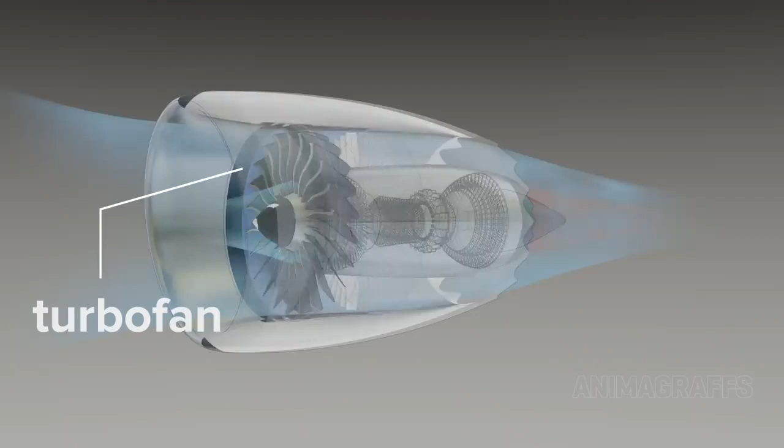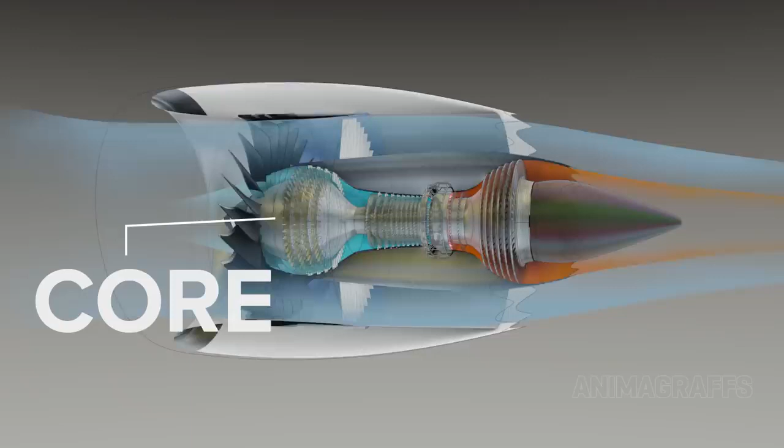Most jet-propelled airplanes use a turbofan design. The turbofan can be thought of as a high-tech propeller inside of a duct called a nacelle, driven by a gas generator: the core. The core of a jet engine is a gas generator that creates high-pressure gas to power a turbine. This setup has compressor, combustor, and turbine sections.

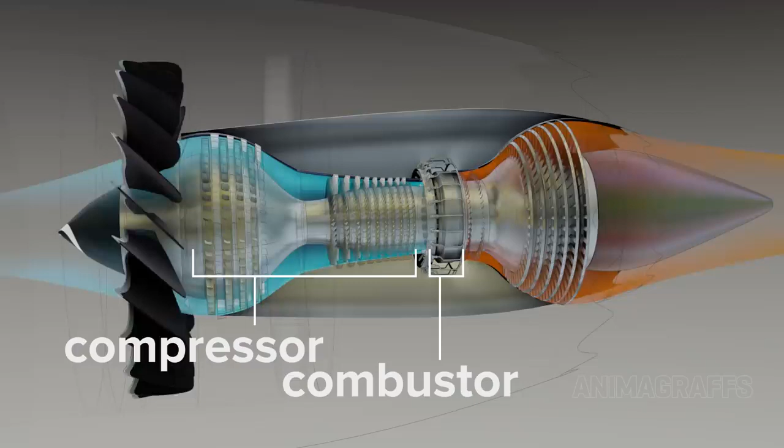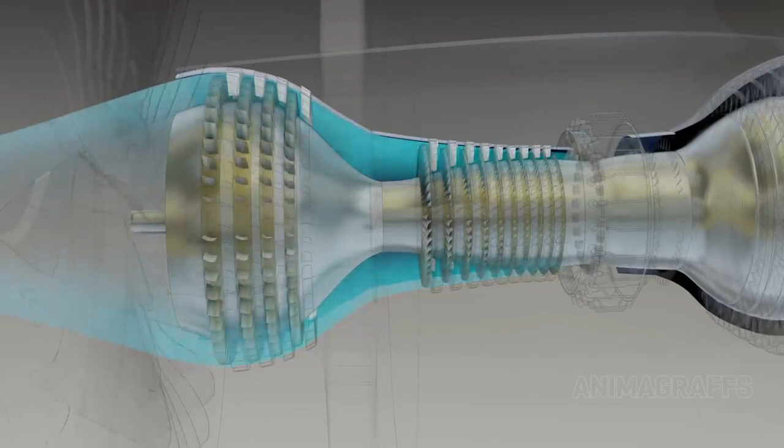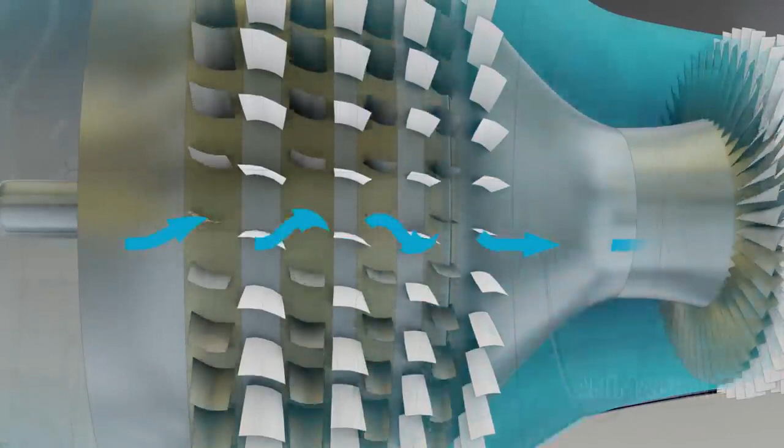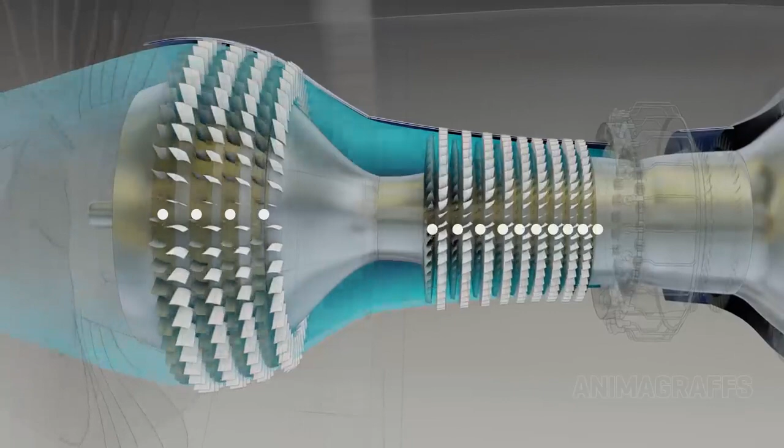The compressor. Compressed air makes for a much more powerful combustion reaction relative to engine size. Compression happens in stages that force incoming air into an increasingly narrow chamber. A single compressor stage is comprised of a spinning rotor paired with a ring of stationary stator vanes, which are attached to the core casing. Rotor blades swirl the air as they force it through the compressor. Stator vanes slow this swirling momentum in exchange for increased air pressure. The compressor has 4 low pressure and 10 high pressure stages.

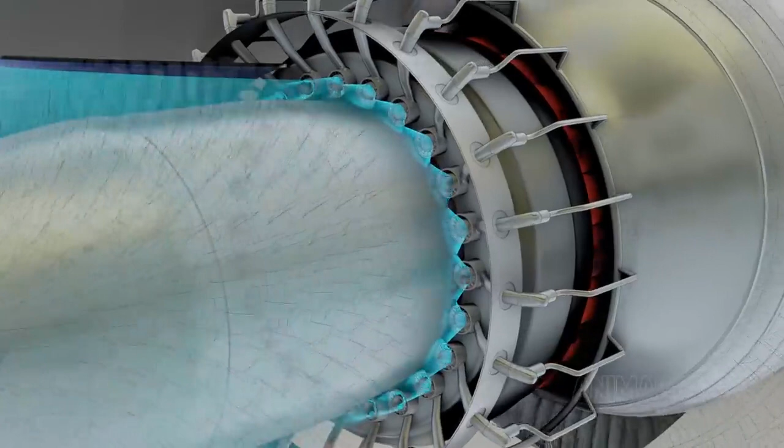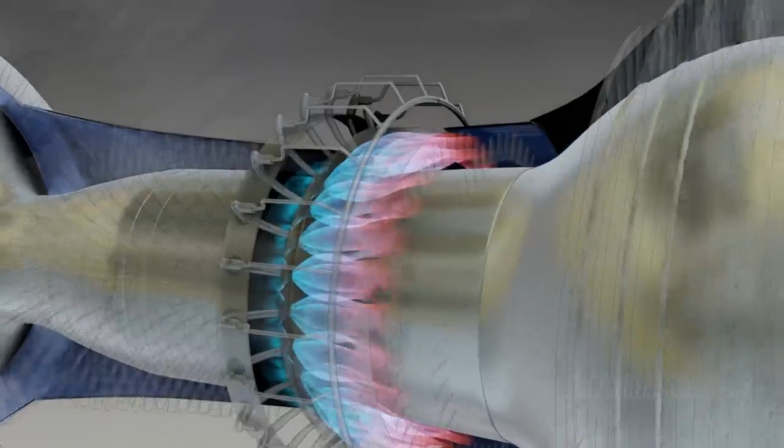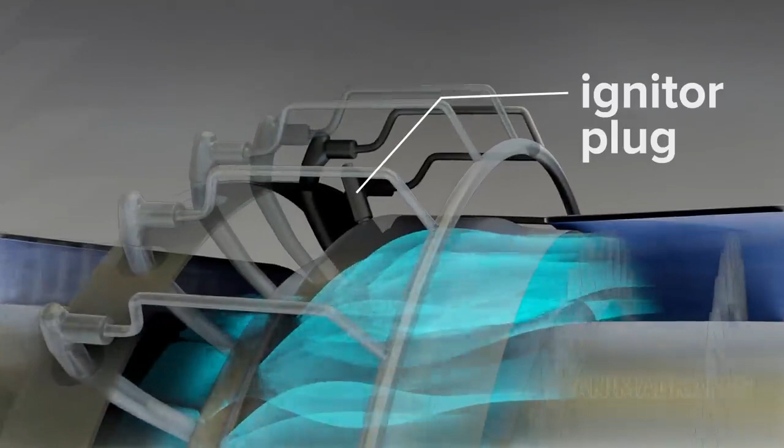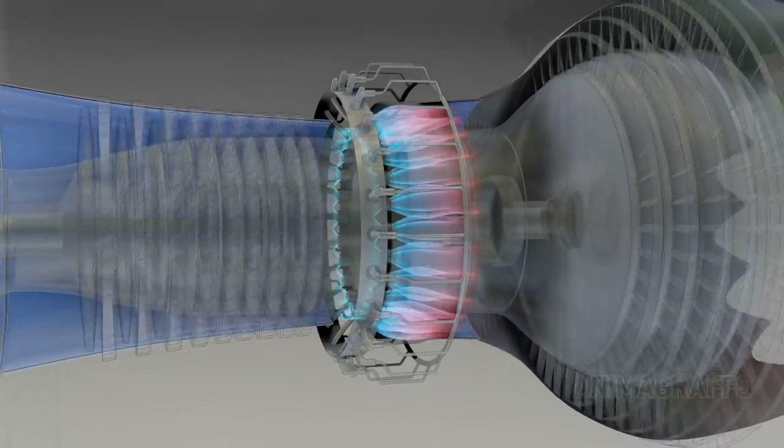The combustor. Air is mixed with fuel and ignited as it passes through the combustor, releasing a jet of super high-powered gas. The design shown here is an annular combustor, meaning ring-shaped. Compressed air enters the inlet nozzles. Each nozzle is coupled with a fuel injector and is designed to swirl the incoming fuel and air for an even mix. A couple of ignitor plugs, not unlike the spark plugs found in car engines, ignite this mixture, and the reaction spreads evenly around the ring. Once started, combustion continues as long as air and fuel are supplied.

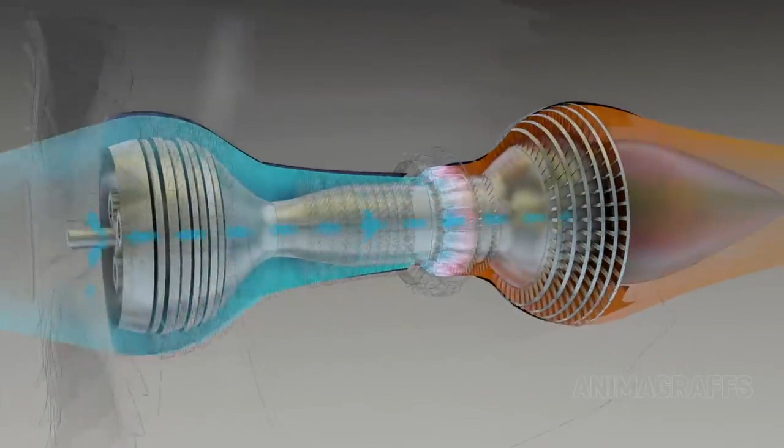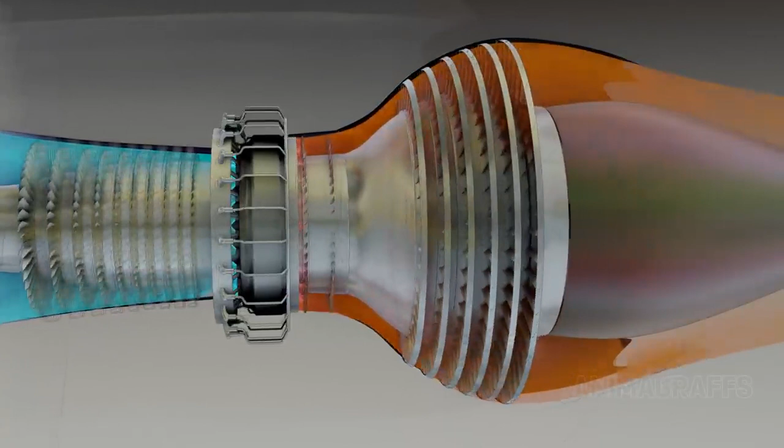The turbine. Turbines at the rear of the jet engine are powered by exhaust gases exiting the combustor. Much of the turbine power is used to turn the fan, while a smaller percentage powers the compressor stages. Turbine fins get extremely hot. Some air from the compressor is diverted for cooling, and special coatings are used to keep temperatures down.

The exhaust cone is specially shaped to mix and accelerate exhaust streams. It also covers sensitive internal engine parts.

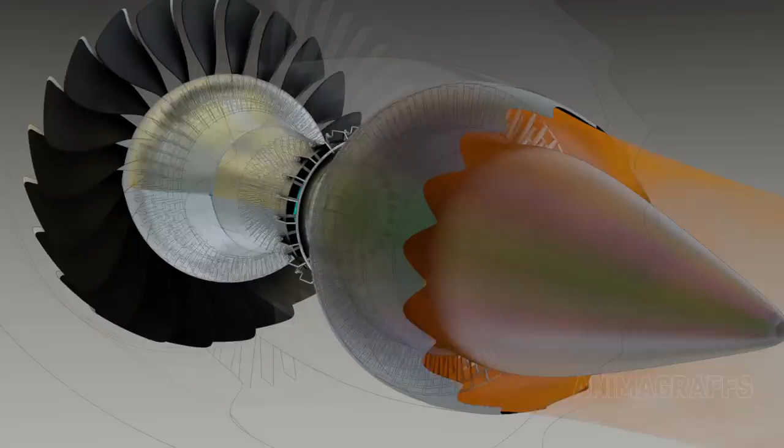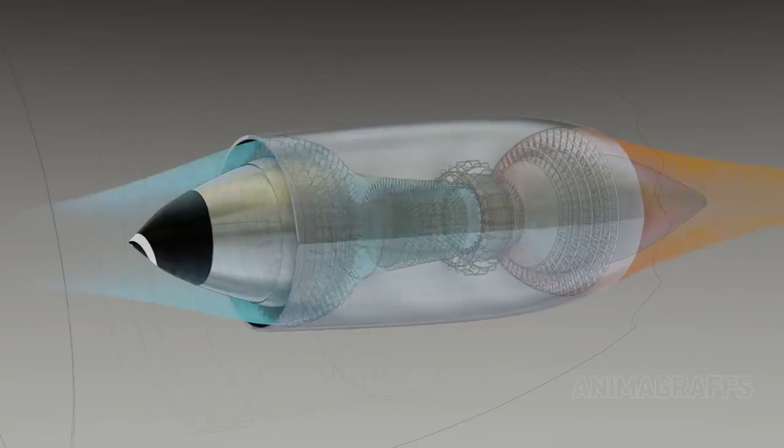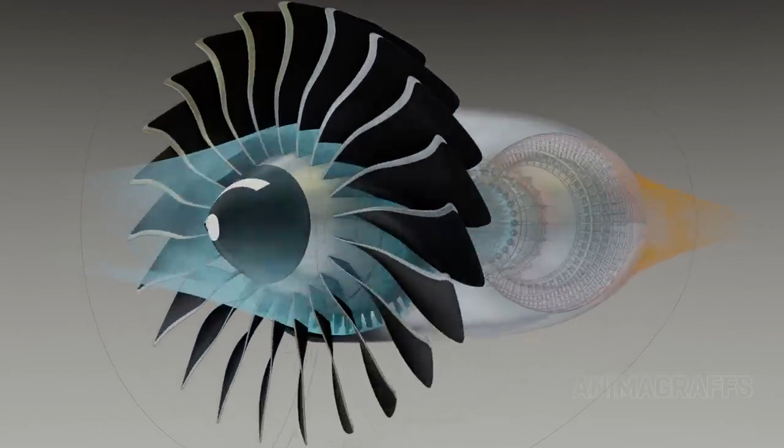The fan. Early jet engines were turbojets, where all incoming air flows through the core. Most modern winged aircraft engines are turbofans, where only a fraction of air enters the core or gas generator, and the resulting power turns a specially designed fan. Again, the fan can be thought of as a high-tech propeller inside of a duct. Air that does not enter the core is called bypass air.

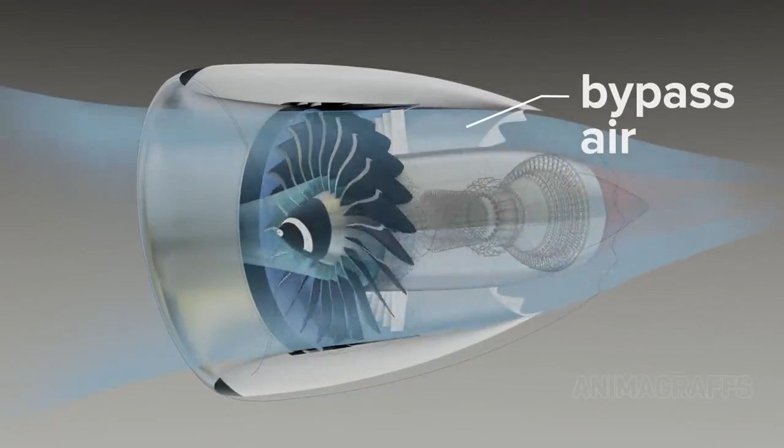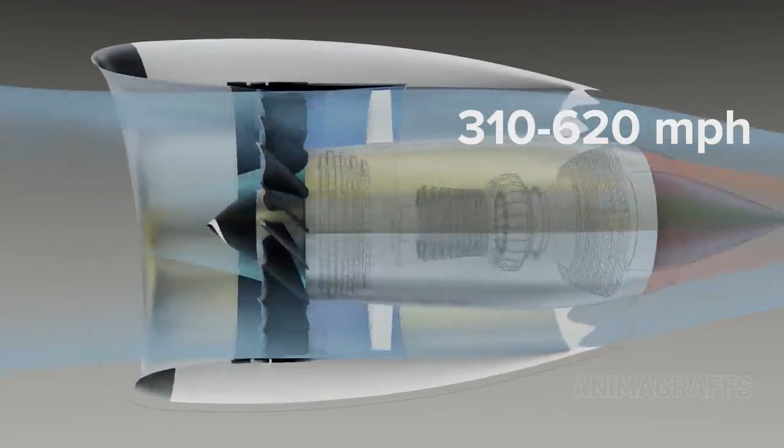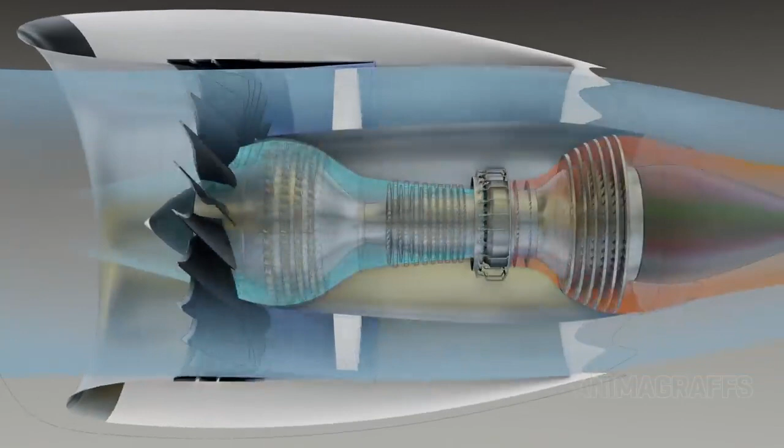High bypass engines are designed to move large quantities of air at slower cruising speeds, a range of about 310 to 620 miles per hour. The exchange for high efficiency is engine size. High bypass engines can be very large, with massive fans compared to core size. Commercial airliners or military transport aircraft are example applications.

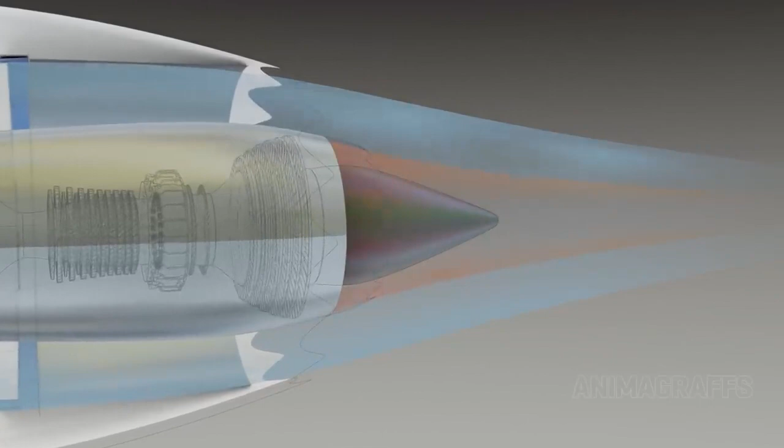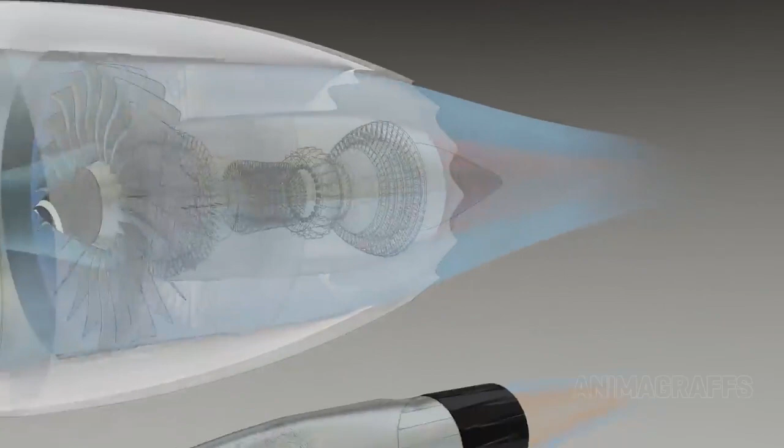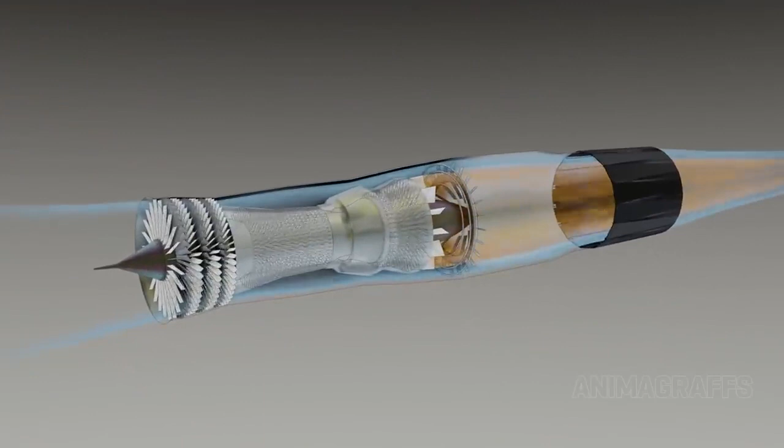Exhaust velocity is a major factor in jet engine noise. High bypass engines surround fast-moving core exhaust with large quantities of slower-moving bypass air for quieter operation. Military fighter aircraft use low bypass engines, which are more compact, have high power-to-weight ratios, plus supersonic and afterburner capabilities, in exchange for things like poor noise control and high fuel consumption.

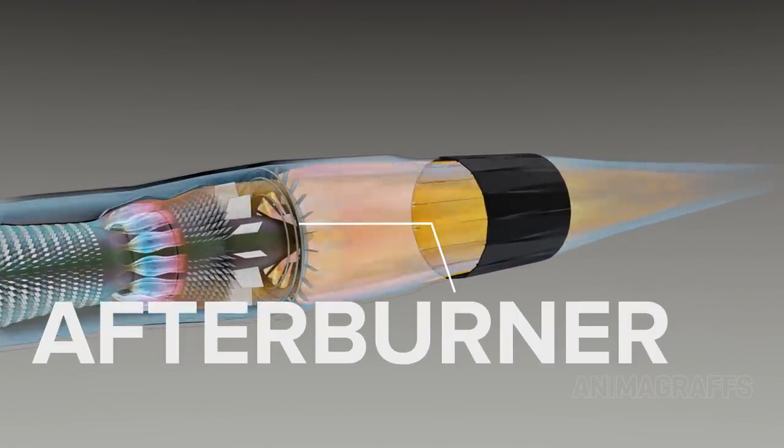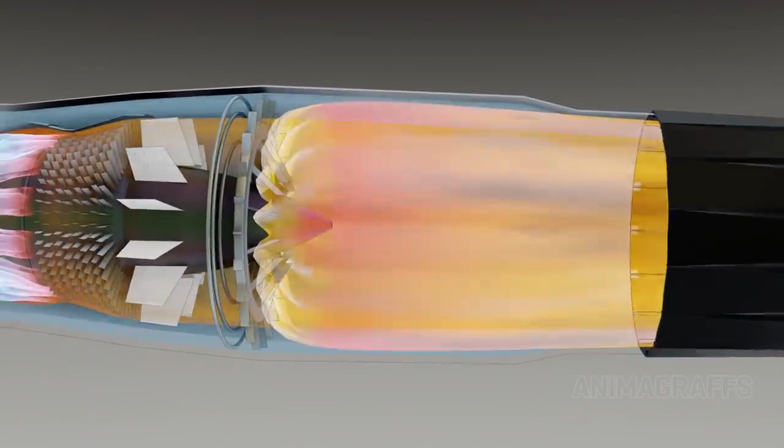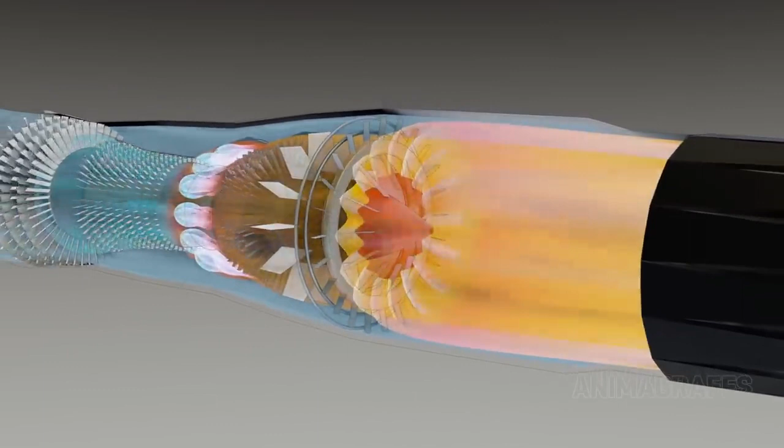Afterburner. High-performance engines may have afterburner capability. Additional fuel is sprayed into a jet pipe section where it mixes with exhaust gas and is ignited, producing a second stage of combustion. Since afterburner is fuel inefficient, it's generally used in short bursts during takeoff, climb, or combat maneuvers. The exhaust nozzle is adjustable for maximum exhaust acceleration and to avoid undesirable back pressure, which can harm forward engine parts.